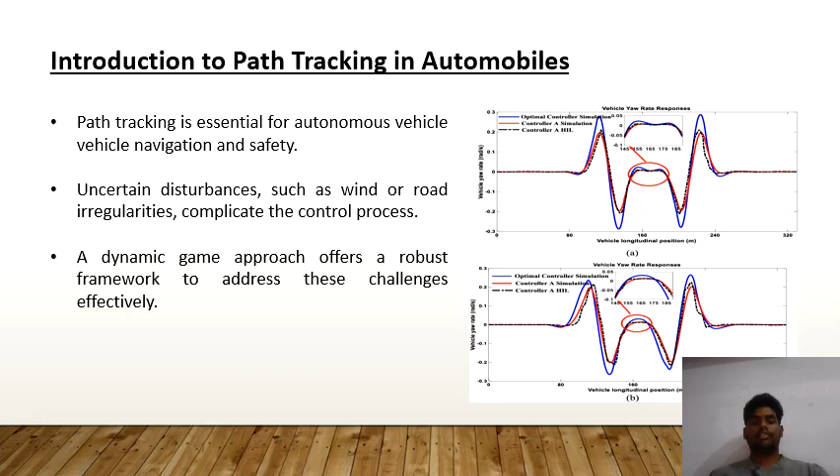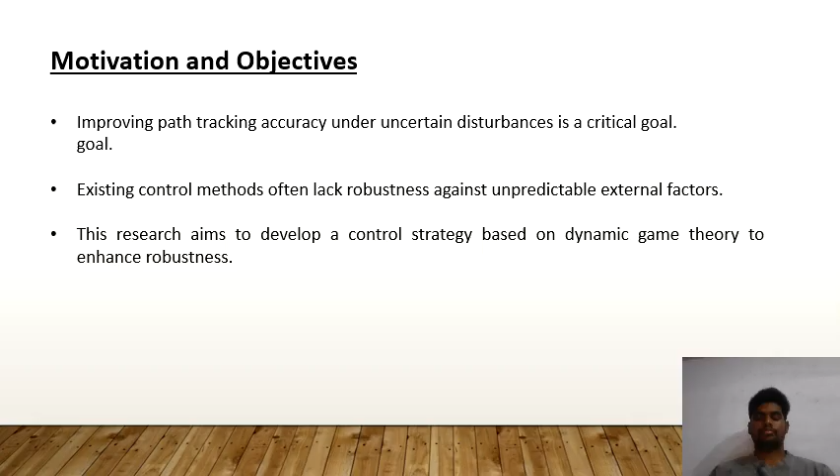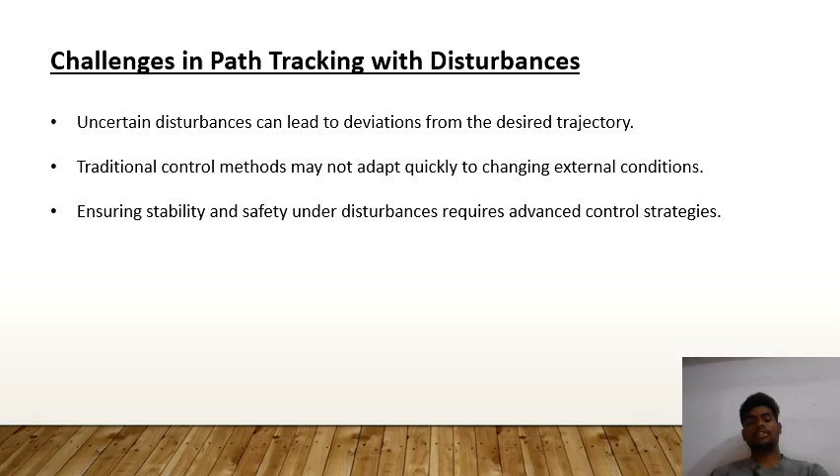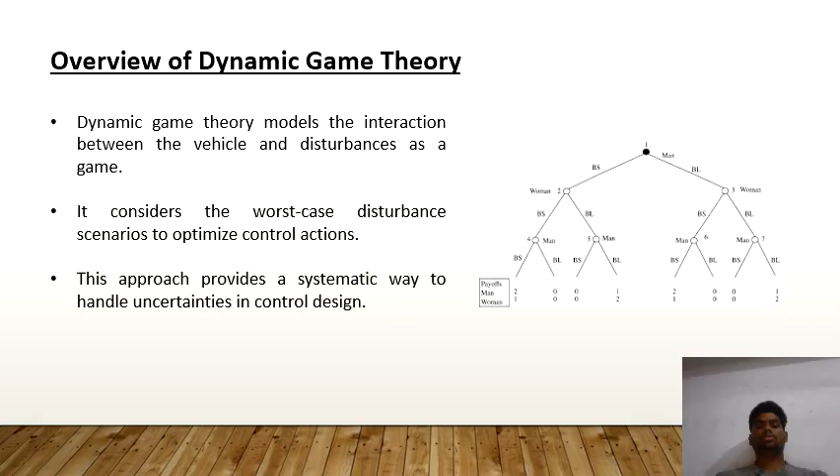Overview of dynamic game theory. Dynamic game theory models the interaction between the vehicle and disturbances as a game. It considers the worst case disturbance scenario to optimize the control actions. This approach provides a systematic way to handle uncertainties in control design by analyzing the norms and terms to design a map or a graph to reach our destinations without any disturbance.

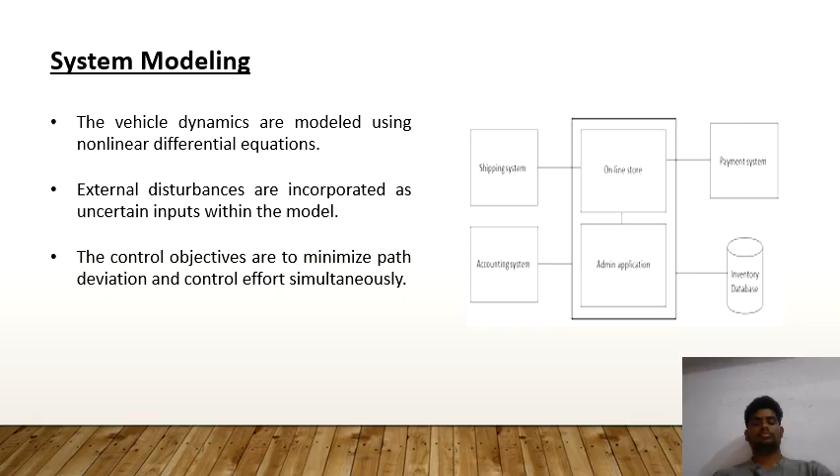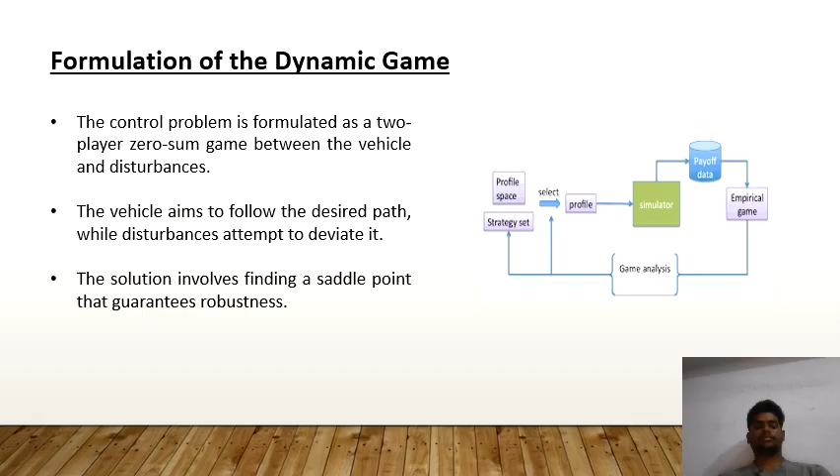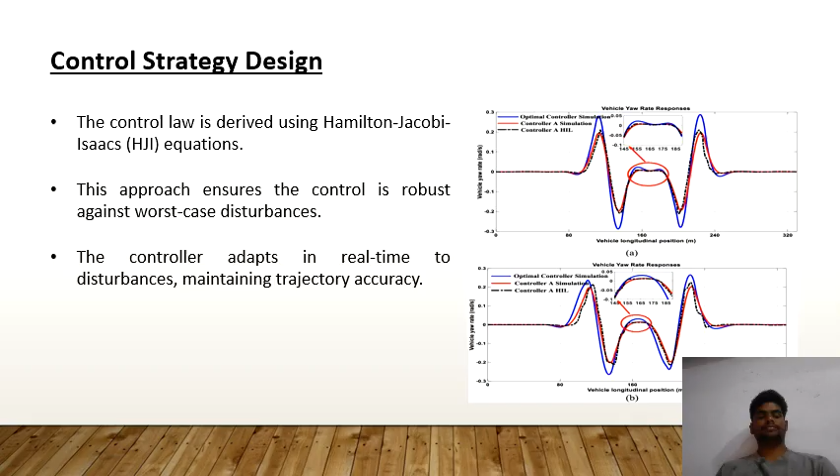Control strategy design. The control law is derived using the Hamilton-Jacobi-Isaacs equation. This approach ensures the control is robust against worst case disturbances. The controller adapts in real time to disturbances, maintaining the trajectory to reduce the disturbances.

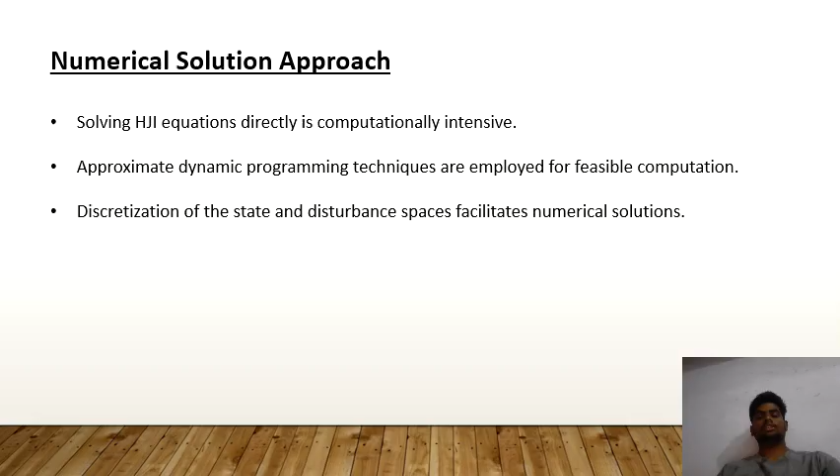Numerical solution approach. Solving HJI equations directly is computationally intensive. That means it can be difficult to solve the equations with a normal conventional intention. Approximate dynamic programming techniques are employed for feasible computations. Discretization of state and disturbance space facilitates the numerical solutions to reduce the impacts.

Simulation setup. A typical vehicle model is used for simulation incorporating realistic dynamics. External disturbances are simulated as uncertain, time varying inputs. The desired path is a predefined trajectory such as a lane center line.

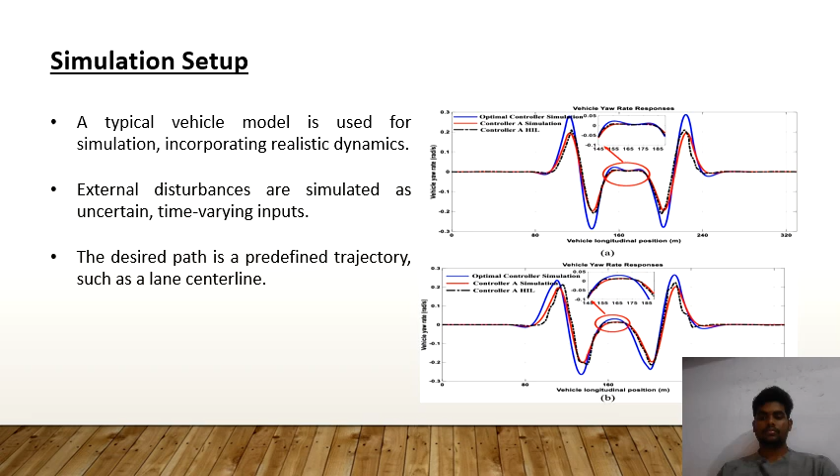Performance metrics. Tracking error measures the deviation from the desired path. Control effort evaluates the energy used to maintain the trajectories. And robustness is assessed by the system's ability to handle varying disturbance levels across different ranges and distributions among the metric values to perform the optimized way of trajectory.

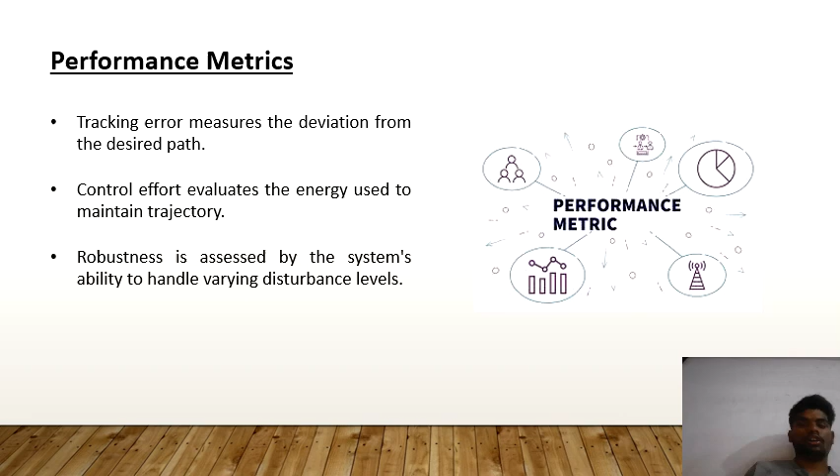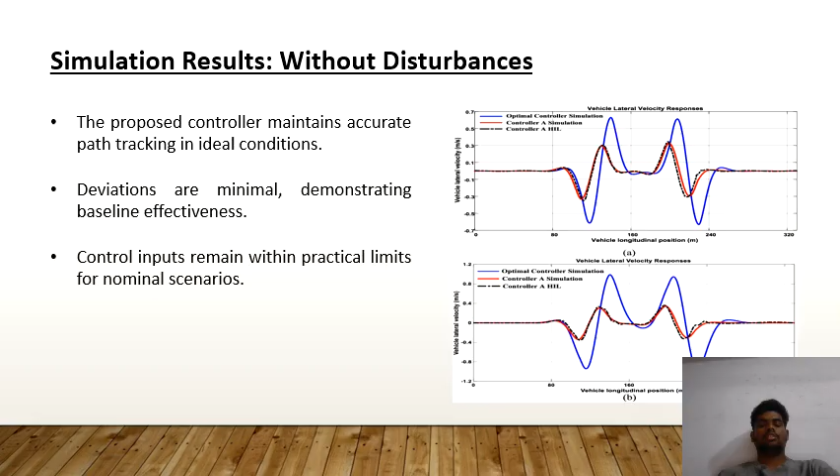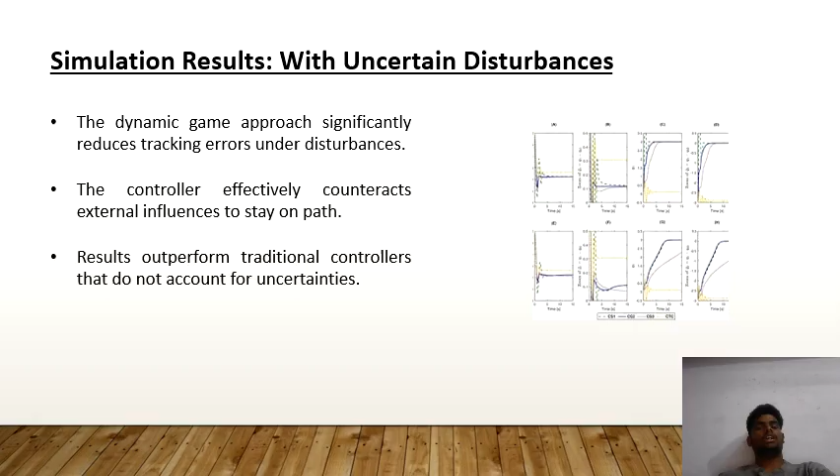Simulation results with uncertain disturbances. The dynamic game approach significantly reduces the tracking errors under disturbances. The controller effectively counteracts the external influences to stay on the path. Results outperform traditional controllers that do not account for uncertainties, like this graph which has shown the uncertainties.

Comparative analysis. Compared to PID and LQR controllers, the game based approach offers superior robustness. The control law adapts proactively to disturbance changes. These methods enhance the vehicle safety and reliability in unpredictable environments.

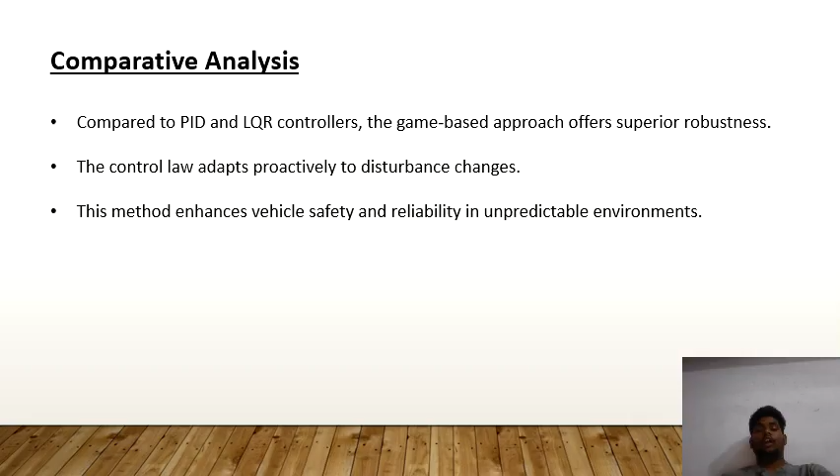Advantages of dynamic game approach. Provides a worst case optimal control solution considering uncertainties. Ensures the system stability and safety under a broad range of disturbances. Facilitates the systematic design and analysis of robust controllers across the game.

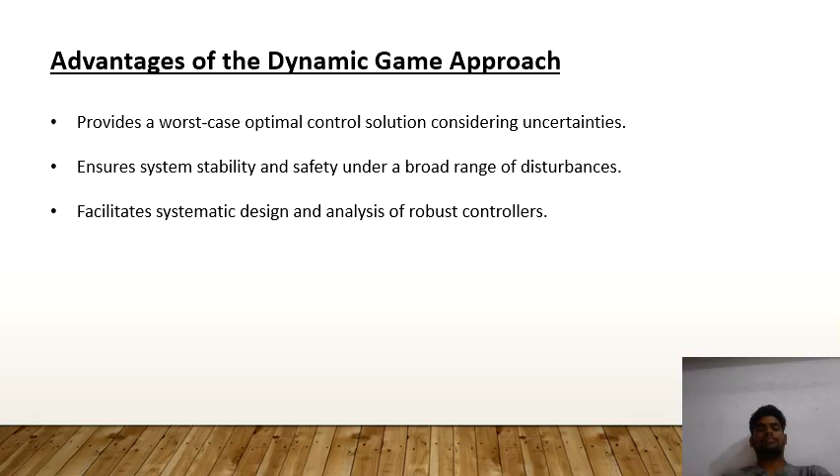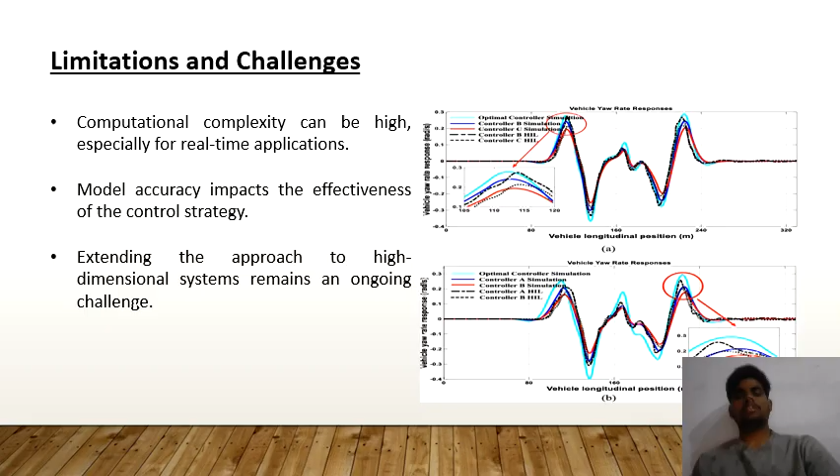Limitations and challenges. Computational complexity can be high, especially for real time applications. Model accuracy impacts the effectiveness of the control strategy. Extending the approach to high dimensional systems remains an ongoing challenge, which may vary with the different terms and technologies.

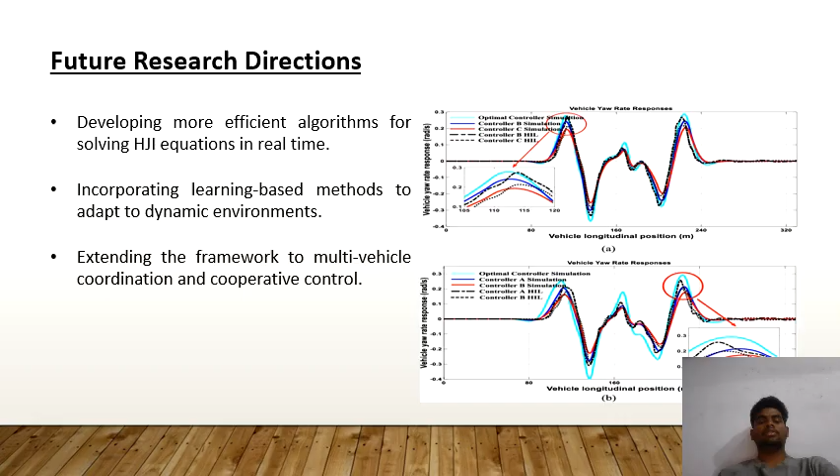Future research directions. Developing more efficient algorithms for solving HJI equations in real time may improve the effective resilient distribution system. Incorporating learning based methods to adapt to highly dynamic environments. Extending the framework to multiple vehicles, coordinating and cooperatively controlling.

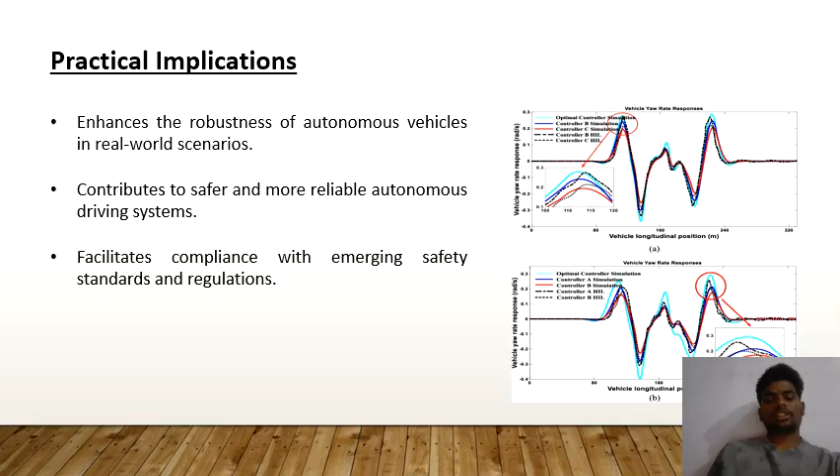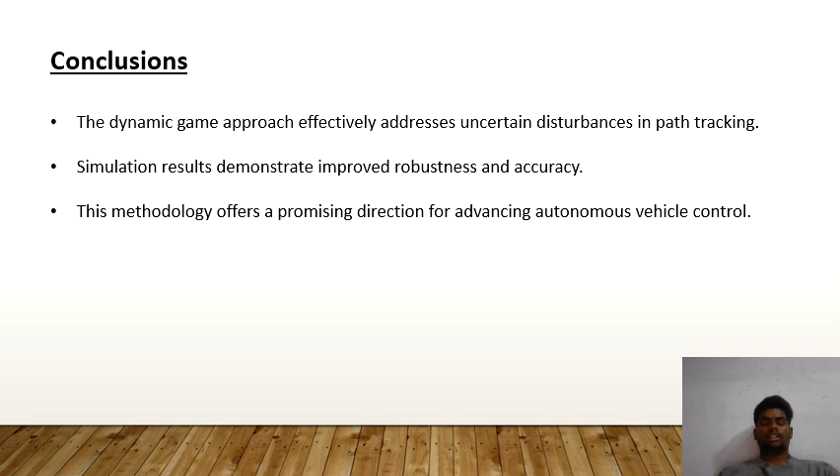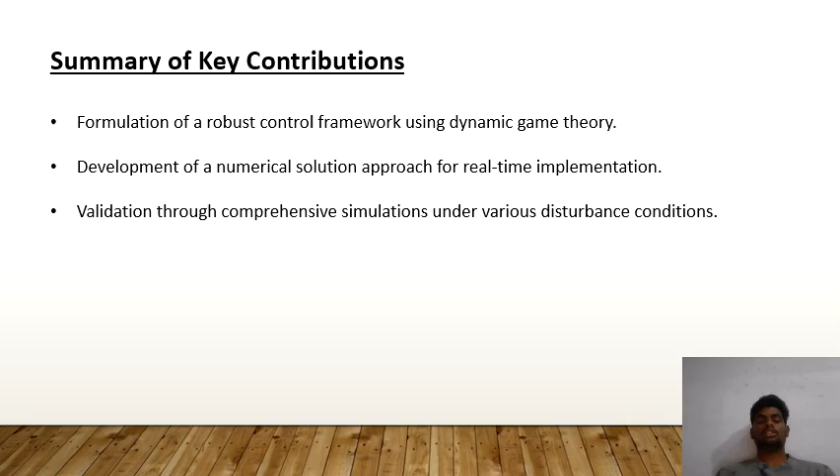And the summary of key contributions: formulation of a robust control framework using dynamic game theory is a very tough situation, and development of a numerical solution approach for real-time implementation is another key contribution. Validation through comprehensive simulation under various disturbance conditions is another achievement through these key contributions.